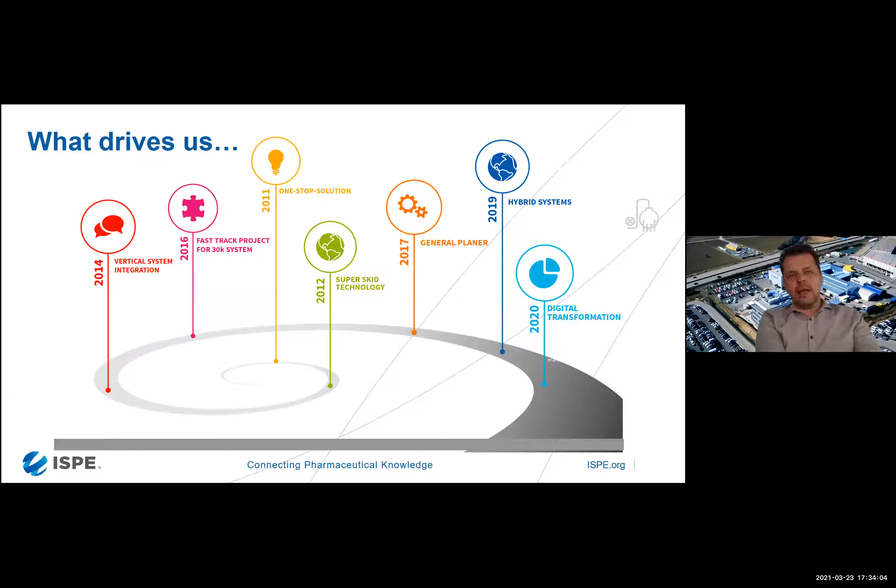And why I'm telling that is that our way of work changed a lot in 2017, because we were using a lot of digital tools then for planning, for electrical planning, for P&ID creation, for everything. But we realized that by putting together these different tools and exchanging data in an Excel format or whatever, this is not sustainable for us. So in 2018, we decided to digitize our engineering workflow.

Like you know from an ERP system, everybody is digitizing the business-driven workflows in an ERP system, let's say, if the company exceeds a certain size. And we thought about how to implement a digitized environment for our engineering workflow. And this is why we became experts in a number of domains in digitalization, and this is what was driving us.

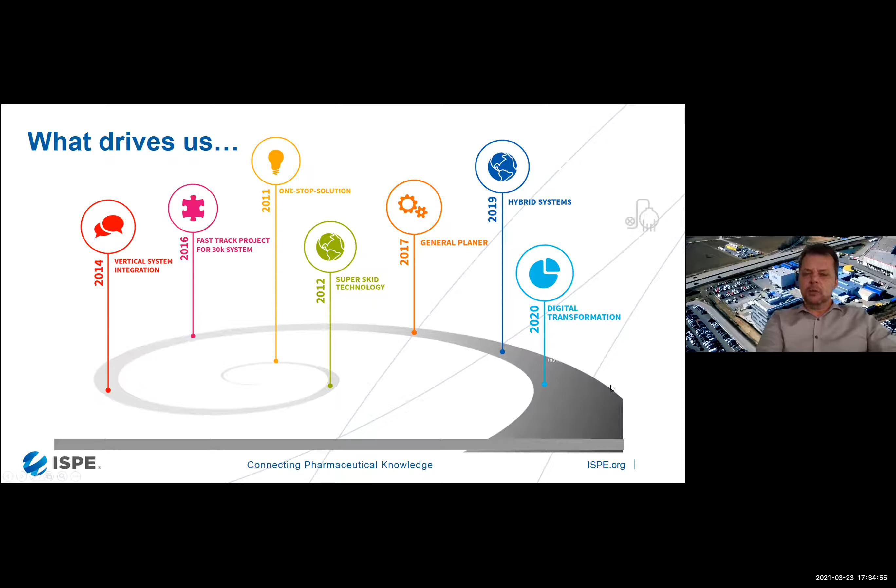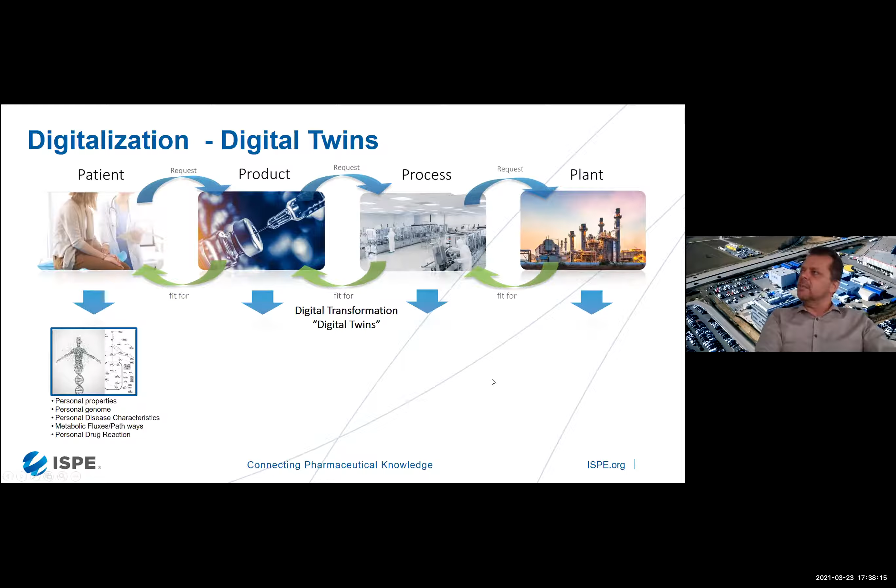Now, how does the digital twin come in? Just imagine you transform all of these four topics to the digital domain, and you try to get a digital representation of the physical patient, the physical product, or the physical process. This is where we say, what could be the digital twin of a patient? It's about its personal properties, its genome. It might be some disease characteristic or metabolic fluxes. The digital twin of the product can be seen as its product structure, its properties, its design. And you can go forward.

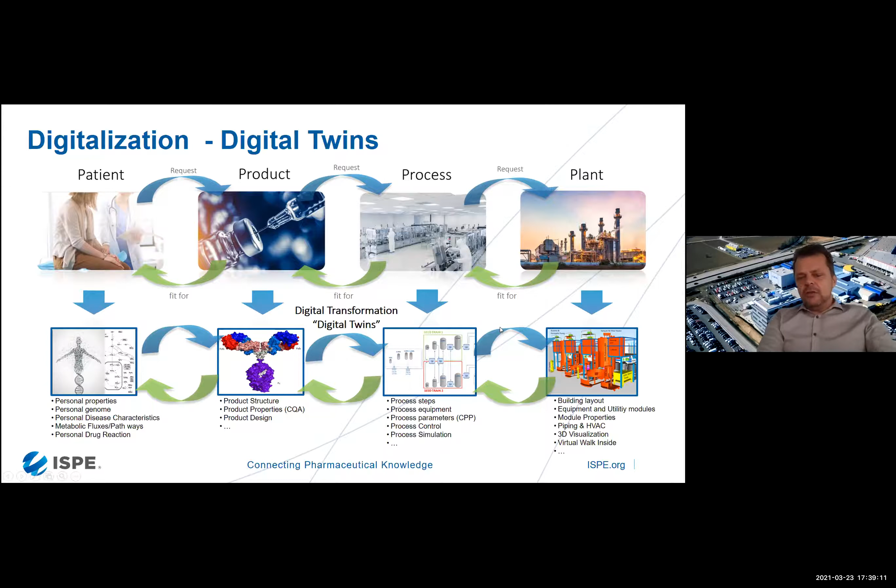Of course, there is a digital twin of the process, which covers the process steps, the equipment, the critical process parameters, and its simulation. And also you can think about the transfer from real to digital as a 3D model of the plant, which then represents the digital twin of the plant. And again, in this domain, the digital representation has to collaborate with the other domains. So this is why when we at ZETA talk about the digital twin, we don't see that there is this one digital twin, but we see different build-outs of the digital twin for different purposes. And I want to follow this concept a little to give you some ideas that we discovered recently.

Then there's the question, how do you create these digital twins? And creating these digital twins is more or less the digital engineering approach. So if you combine all the different tasks from process engineering to mechanical engineers, the plant engineers, the electrical engineers, the automation engineers, if you combine all these disciplines over the tasks, like for basic engineering, for detail engineering, for qualification topics, then you're creating this content representing the digital twin of the plant, but also the digital twin of the process, more or less as you work.

And what you can do with it is you can use this deep digital information for reducing the project risks. It's easier to manage interfaces since you're in one digital platform. You can improve change management and you have a transparent project progress, but you also can significantly reduce time for qualification and validation by using the content of this digital twin as seen in different documents, in different scenarios, in the 3D models where you can train your operators, or you can even integrate VR or AR solutions.

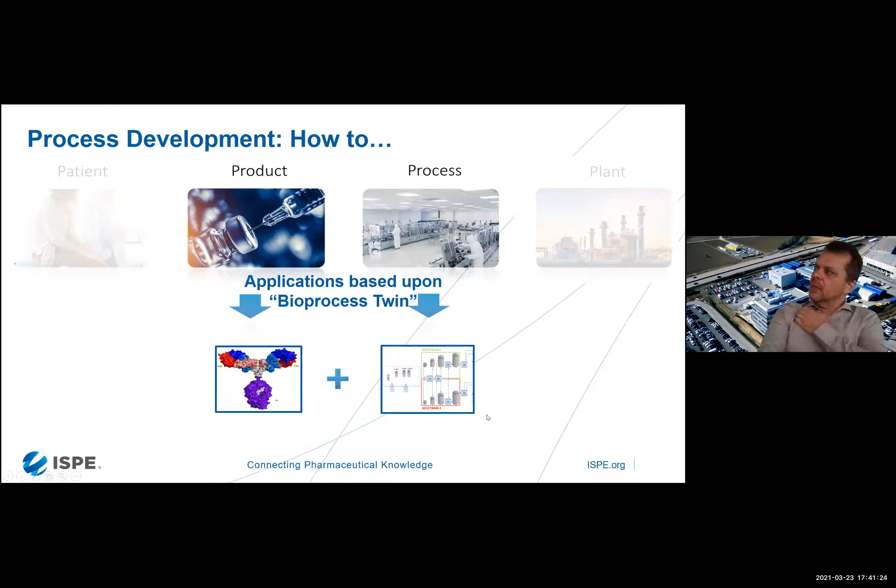So transforming the way you work during engineering and fabrication to a total digital domain delivers digital twins for process and plant with significant benefits during startup and commissioning. There are two other views on the digital twins, like product and process. So it's about getting a digital twin of the product and then the process, and how do you create these ones? Well, we have been talking about how you can cover the digital twin of the process. It's the same like we already did.

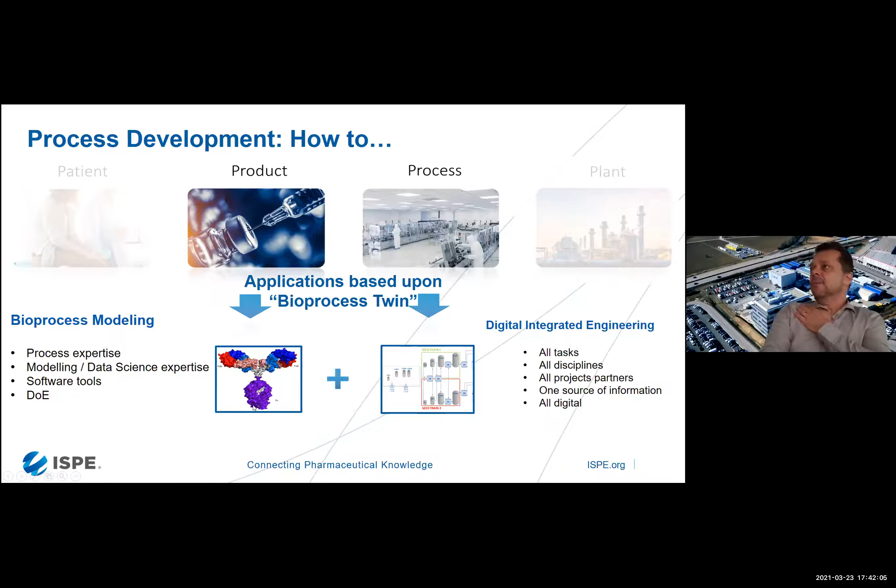And if you want to capture the digital twin of a product, it's what you usually describe as bioprocess modeling. So you're trying to get an idea on how you create this product you're looking for. How do you create a process that is securely delivering this kind of product? And then you're in the domain of DOE, modeling, data science expertise. And on the other hand, how to create the process we're already discussing. And what could you use these digital twins for?

Well, QbD and DOE are relatively frequently used terms for how you should start looking at your development road. You go for improved process understanding, you try to get a scientific-based approach, and you're using the data to find out how your process and your product are interacting. And if you do it in an even smarter way, you can also use the combination of this knowledge for model-based design of experiment, which means that you're not screening the space as you were used to, but you say, well, I know something about my process already. I want to have the experiments in this or that domain because there it looks most promising, and I don't have to test areas of my design space where I know that the process optimum won't be.

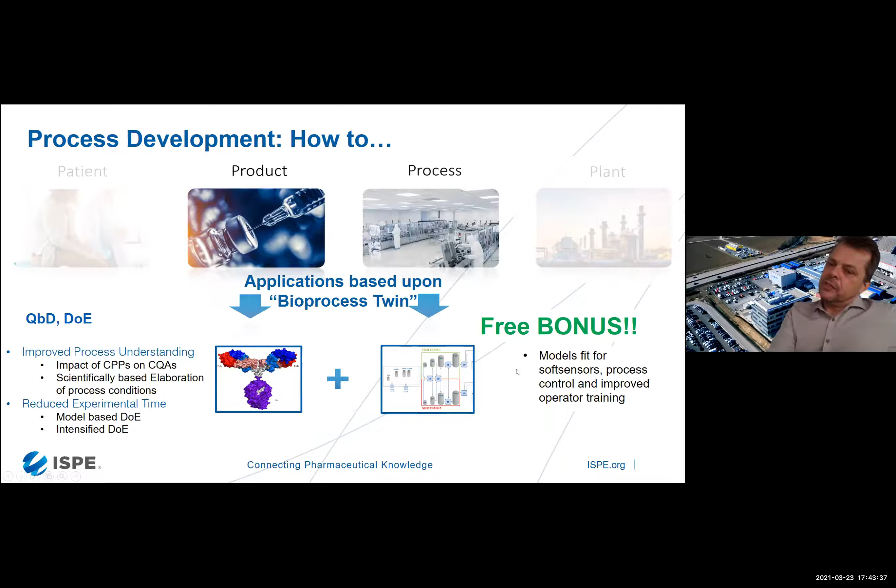Or it leads to new approaches, like actively changing the parameters during a cultivation, and you go towards the intensified DOE approach. As a free bonus, you could reuse these models during manufacturing as soft sensors, for process control and operator training. So also in this domain, digitalization plays an important role.

So well, everything's done, huh? Well, almost. If you look from a different point and you ask, what questions do we want to get answered by this approach? It depends from which perspective you look at it. If you're talking about the product and process topic, it's about how different process conditions influence the product. It's about how I can use the generated process information to reduce experimental effort. It's how safe the process is for the product. And this is the domain of our end customers, and the domain of some consulting companies in the field of AI, ML, or whatever. So these are the drivers and the players playing the most significant role between product and process.

It's a little bit different when you look at who is involved in combining process and plant. Then it's about the engineering companies. It's about how different scales and types influence the process to deliver an industrial scale process that meets the needs of the end customers. It's about what resulting equipment I need for industrial production, what CapEx costs have to be expected, by which OpEx costs I deliver a safe process regarding the operator, and how to meet the qualification and validation requirements. So having a view on these two steps, process and plant, and its digital twins, you have very different questions.

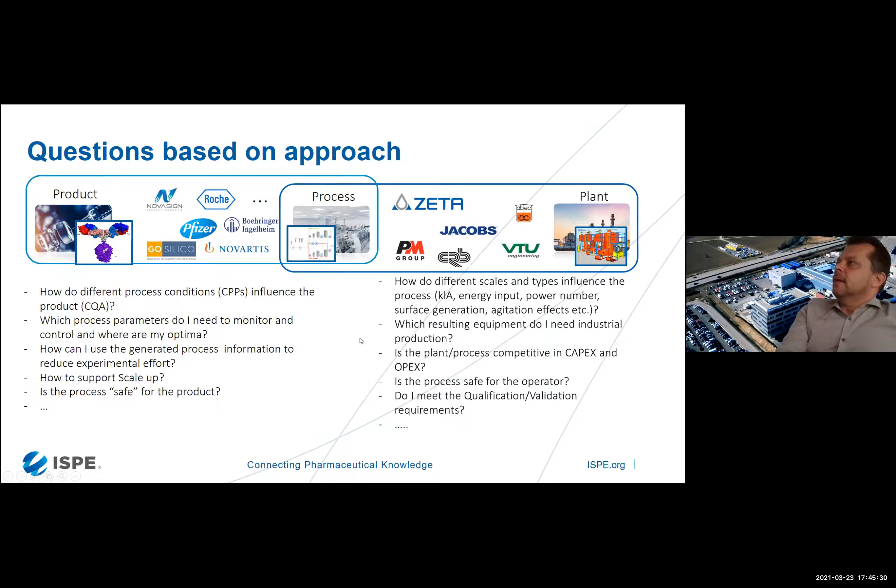And we thought, why not combine all three of them? Why not combine all the know-how and the digital things that you have at hand and say, well, if I have a model of the product and the process from the development point of view, why not combine it with a model of the process and the plant? There would be some significant advantages.

Like, you always need a little bit of the know-how that you gained in this domain when you want to create the perfect plant. So we would definitely improve in the engineering results if we had access to all the know-how that was delivered at an earlier stage.

So using the process models to implement quality by design, even then on the manufacturing side, like using the process models for controlling and optimization of a currently realized plant, that would be much more efficiently applicable if you would have a look at all these three topics out of one approach.

But of course, there are some challenges to come that way. One challenge is the different IT platforms. Usually during product and process development, you're in a wet lab, you're in a non-GMP environment, or you're just moving over to GMP. You have small skids, you have all these laboratory environments. And when you're in manufacturing at a site, you have DCS, you have all these established systems, all validated. So it's integrating these different IT platforms that is a challenge.

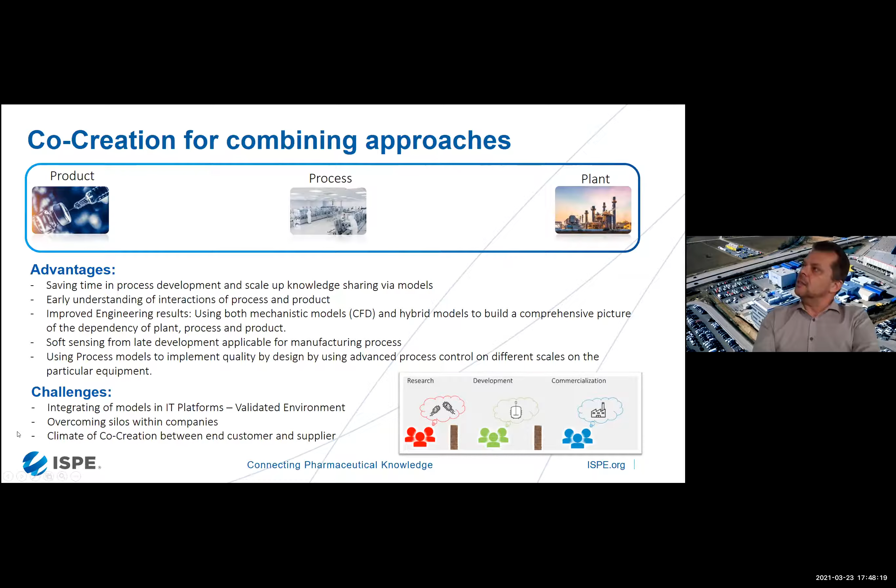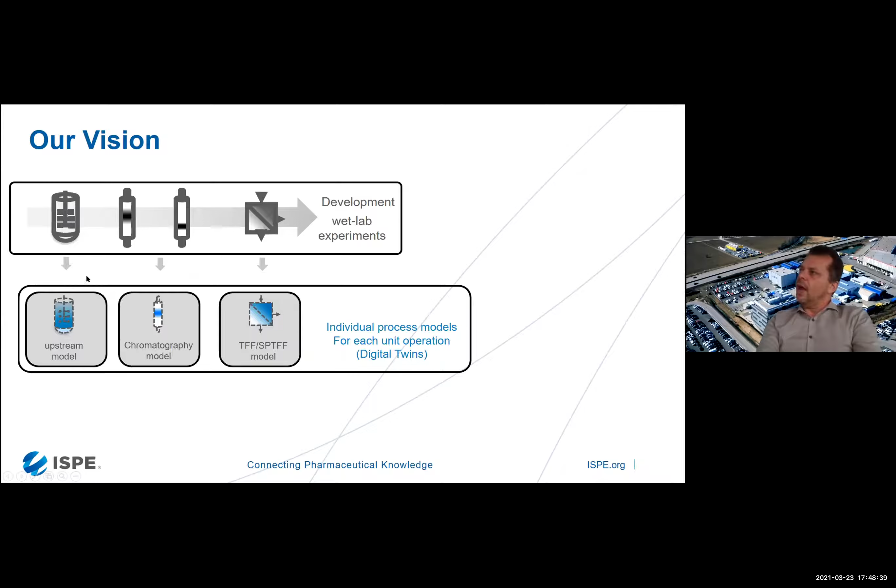So what is our vision? Our vision would start in a wet lab where you say, well, you have your unit operations you want to combine into a new process, and you work with them based on digital twins of these unit operations. So you derive different models for different unit operations, you create these digital twins, and then you combine them into a fully integrated simulation. So you already have a simulated production process of what you're going to expect in a digital format.

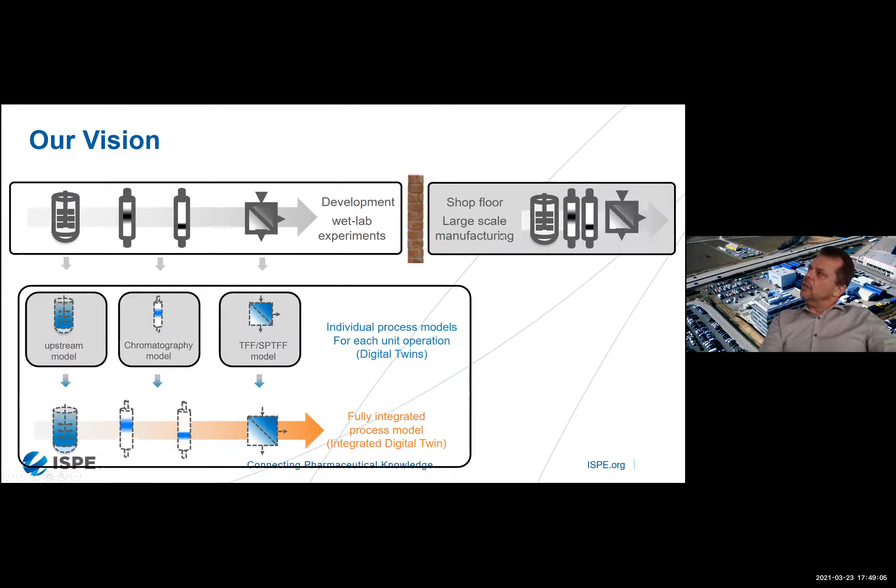And when you combine this, we should think about how to reuse that for the shop floor in large-scale manufacturing. And this is where we see you need a partner to break down the silos and to manage that entire process, so that not only for the wet lab experiments you get the feedback out of these simulations, but you can also use it for the shop floor.

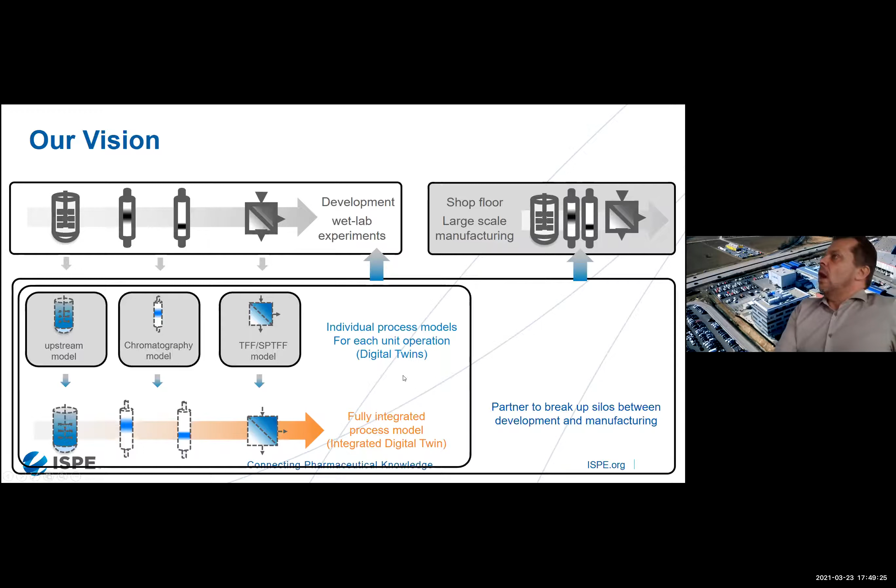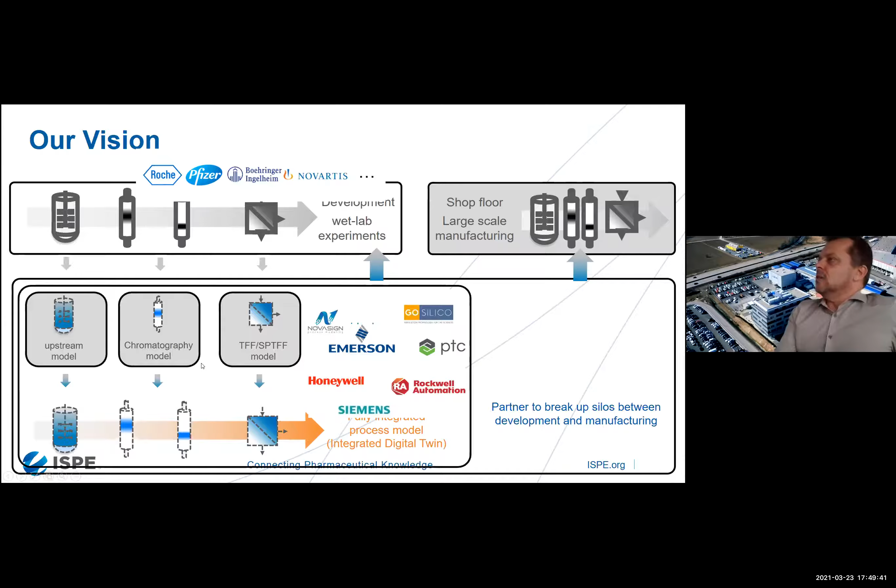So our vision is combining the needs of the customers and their work in the wet lab experiments and in development with what consulting companies and software partners can deliver in terms of IT and finance, and trying to get a group of engineering companies that are able to manage all this available information, so that all these valuable insights you're creating based on the digitalization of your development process are applicable on the shop floor during manufacturing.

So I would talk about using an upstream model that is exactly telling you how a cultivation reacts to temperature changes, and using this model for online control of your cultivation in the validated environment to optimize, for example, the time for the feeding phase or the time for creating the biomass and the seeding phase.

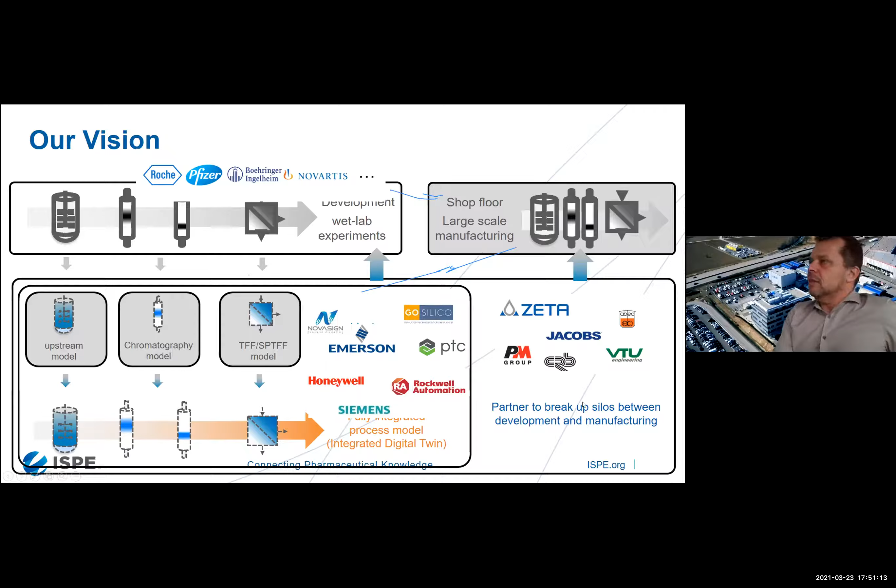So you could look at that like a GPS in your car. The map is the model, and you need something that is running the model at the same time as the process is running in real time, and that is compensating for some changes in the real process. So that would be our idea: to reuse all the knowledge that is gained during development, capture it in digital twins, combine these digital twins and use them on the shop floor.

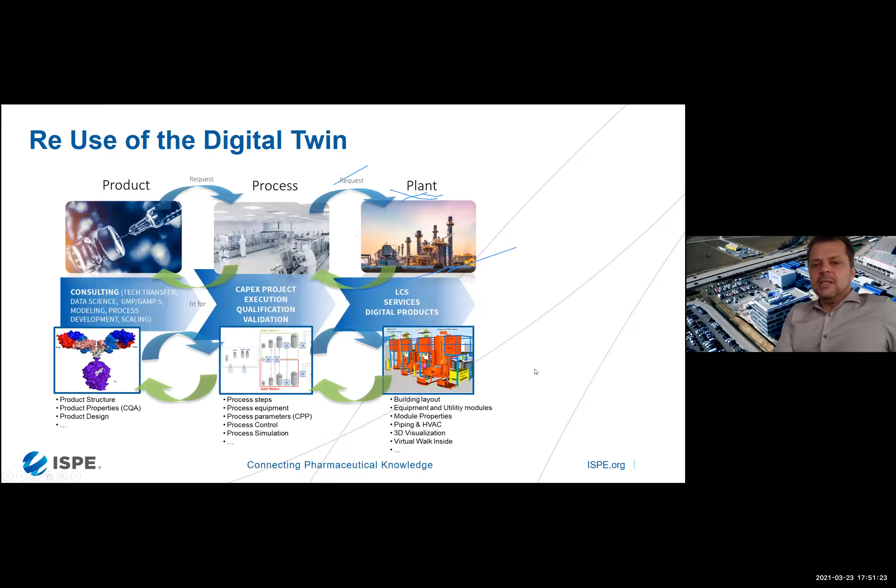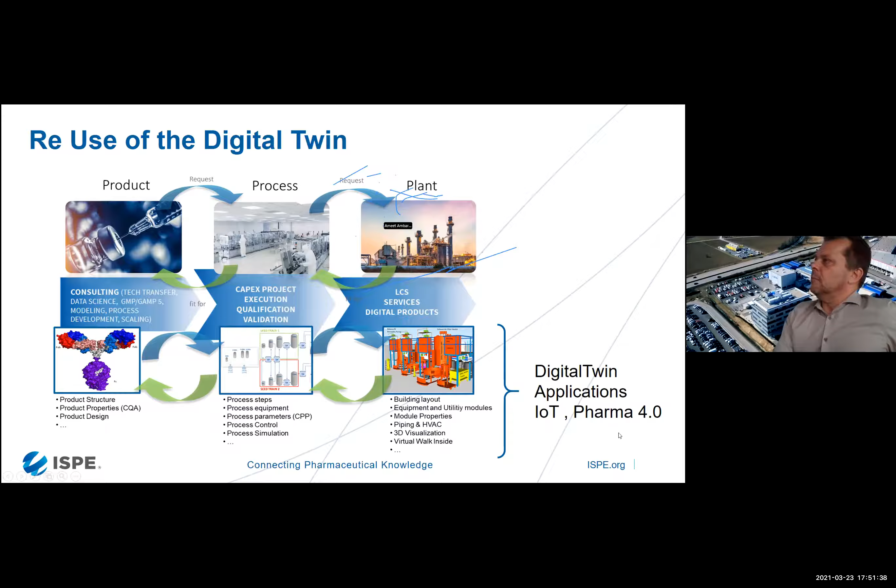And now I want to give you some ideas where we see the reuse of the digital twin. So I'm going to bring you some insight into what we already realized in applications, or what we know about these digital twin applications. They're also seen as IoT applications, or you can look at some of these applications from the Pharma 4.0 point of view.

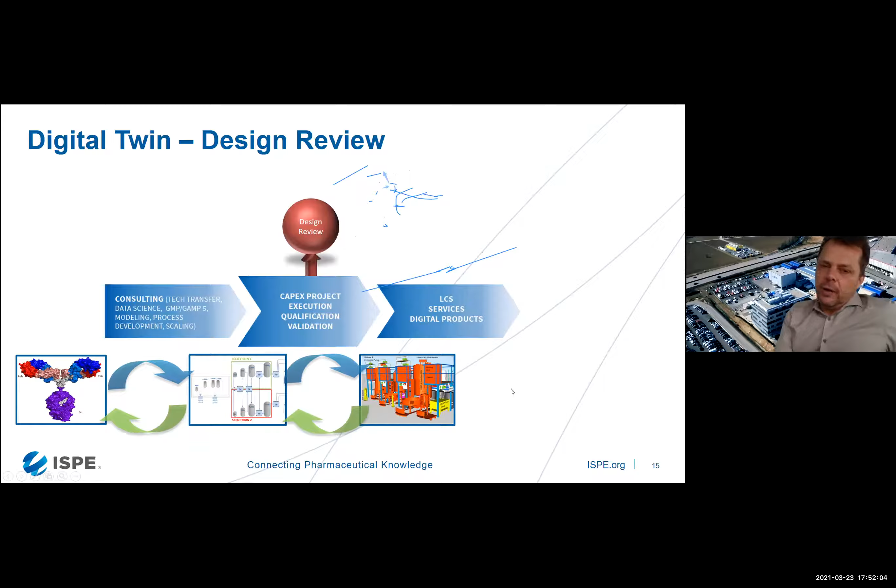So first thing I want to talk about is applying the digital twin during the project phase, during project execution for the design review. So this is something where you have already an ongoing project, you're co-creating with your customers, and you're using the digital twin for clarification of engineering details, for redlining and documentation, a little bit like somebody who is currently putting his drawings into the presentation.

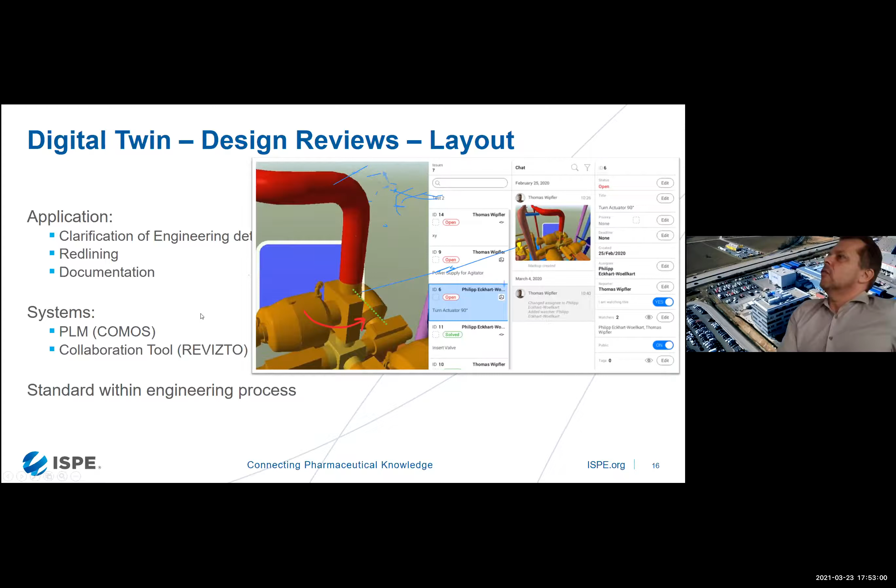We do that frequently. It's one of our standard procedures that, like you see here, when you're at a specific phase where we already have the 3D engineering of our plant, we go into collaboration with our customers, and then they say, well, due to ergonomic reasons, please move that valve 90 degrees to the right angle. And so this is documented here. Out of that, there is a collaborative tool, and we use this digital twin of the plant for co-creating with the customer how to change during the engineering phase.

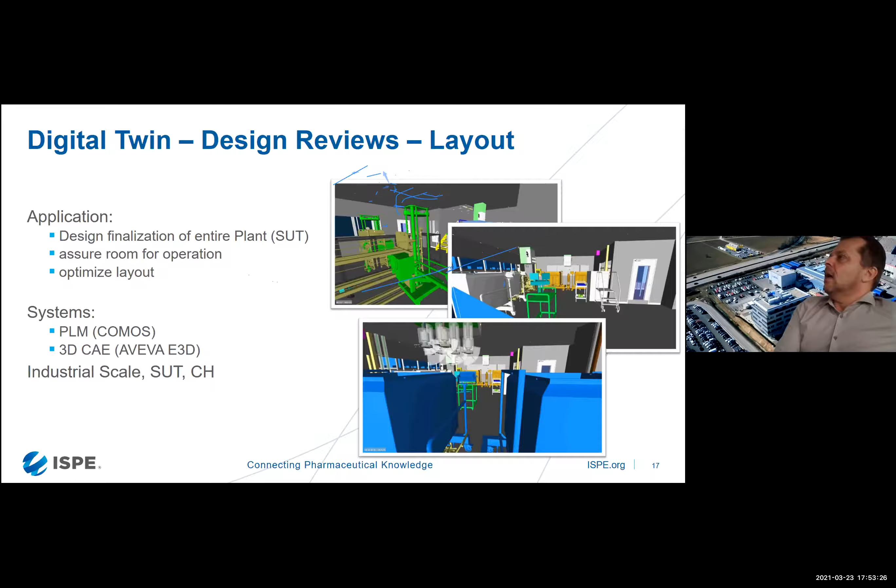What secondly applied also in the design review phase is that at the end of an engineering phase, you get a 3D model. And in that case that I'm allowed to show here, it was the design of an entire SUT plant. So it was single use. And the topic was, are we sure that we have enough room for operation, for moving with the operators and all the other personnel? Because it was a given building and we had to squeeze in quite a bit of equipment. And so the customer together with us was relying on this 3D model of this digital twin of the plant to make sure that there is enough space for moving around.

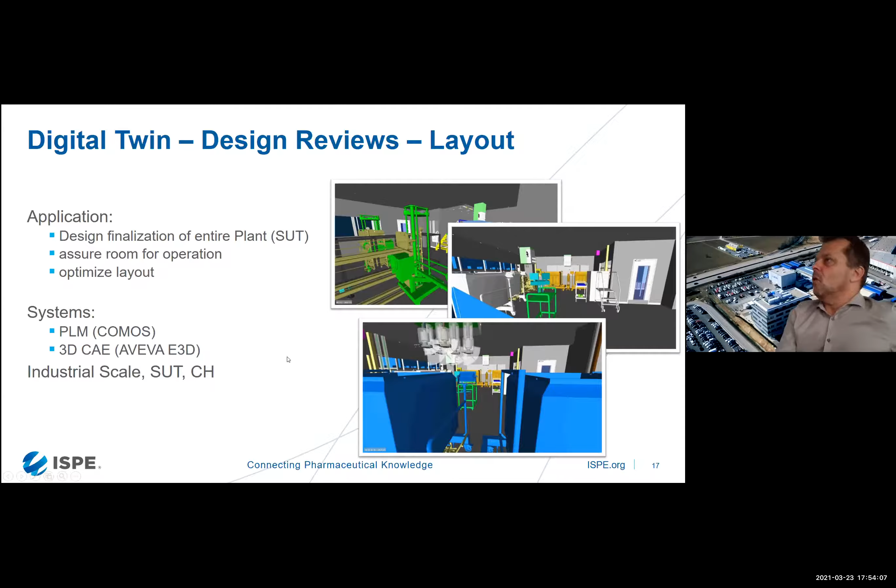And you see, this is why all this auxiliary equipment is included here, because they really wanted to be sure that it can pass through and that there is enough space. So also in this point of view, you're using the digital twin of the plant, which is the 3D model, for securing operations.

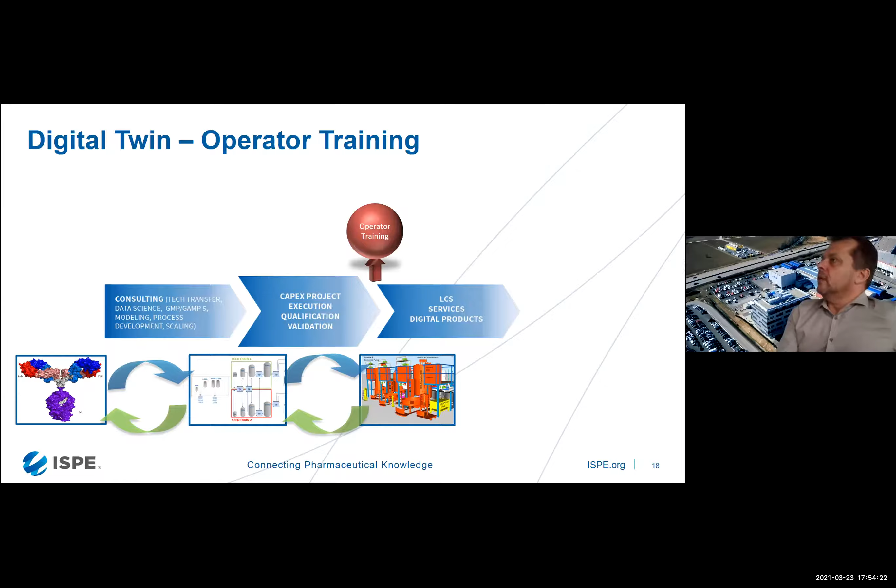Another build out of the digital twin that we have at hand currently is using the digital twin or the combination for operator training. So when you go through this digital engineering, you get pretty much of information. During the engineering, you have every electrical plan, you have the 3D model of the plant as such, you have all the information about automation, and you derive the DCS based on that. So you know about the piping, you know about the positioning of the valves, so you can roughly easily say, well, you can use the DCS and you're using the digital twin of the process, which is covering, let me say, the technical topics like pressure, temperature, and stuff like that.

On top of that, you might put a bioprocess model that will then calculate the impact of the temperature on biomass involvement or on product formation. And you put that together, that you run the process out of a DCS even before the plant is built, because you have all these informations at hand before you go into fabrication of the entire plant. That means you can use the digital twin of the product, which will be the bioprocess model. You will use the simulation of the process and your automation system for an online training of your operators.

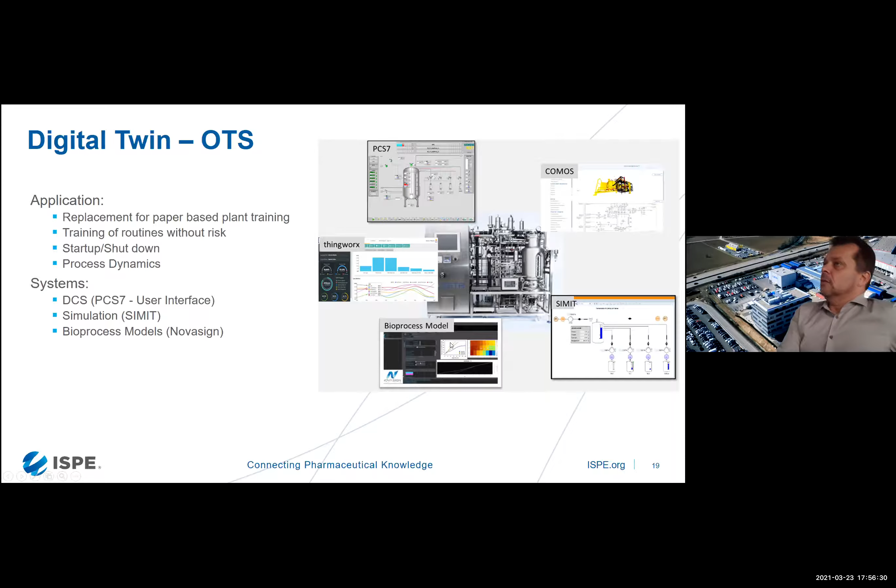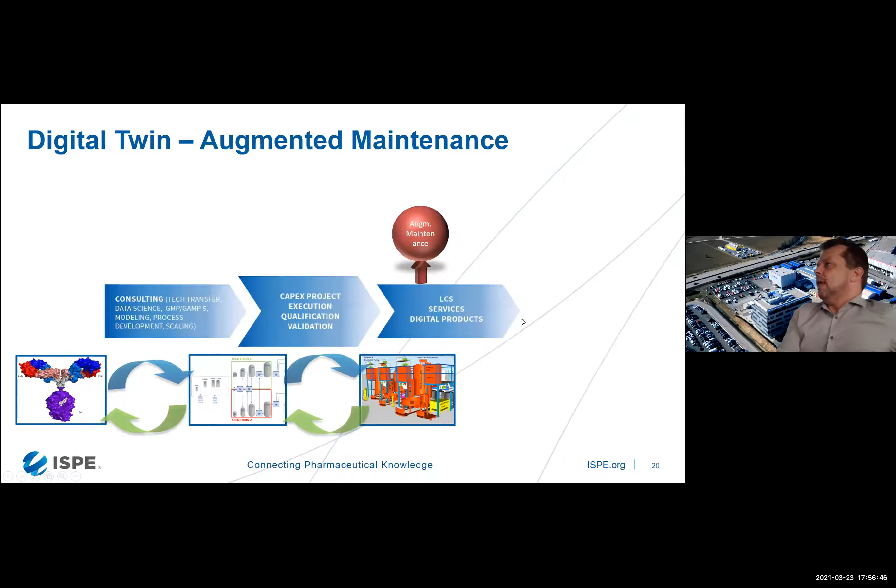Well, finally, there is a third application that I want to show you, which is not positioned during the project execution, but rather when the plant is already up and running. It's about how to augment maintenance activities. And this is using a personal assistant for maintenance engineers. It's a roughly simple idea that you say you're creating such an enormous amount of information during engineering, all the wiring diagrams, all the documentation of spare parts. You know exactly where all your valves are positioned.

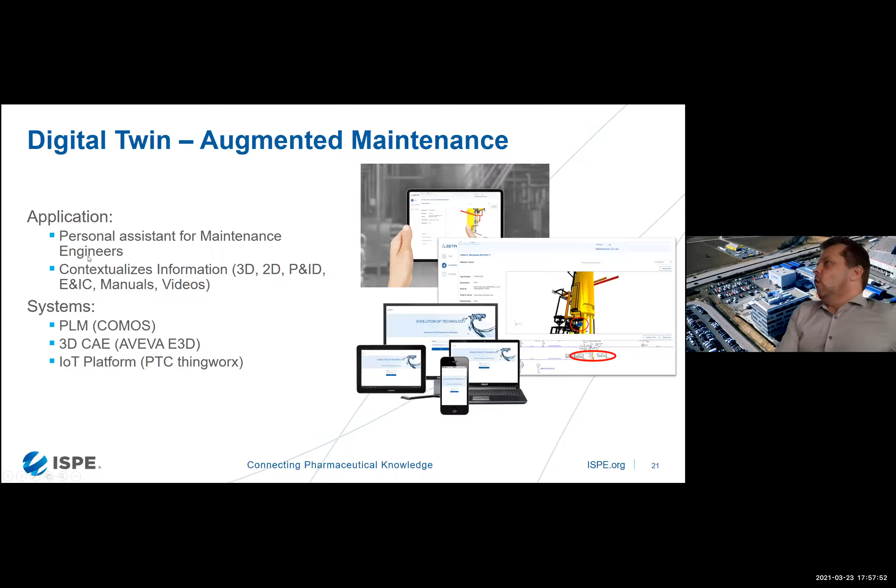You have 3D models, you have 2D floor plans, and we just thought about how to deliver that information in the context that is relevant for the maintenance engineer. So creating a personal assistant that allows for delivering the right information right to the shop floor where the maintenance engineer is working delivers a value add on, let me say, exploiting the digital twin of the plant regarding all the context that is relevant for the maintenance engineer.

So to give you a quick summary, how do I see what drives us in digitalization in the pharma industry? Everybody is working in software in engineering currently. Either it's AutoCAD or it's, I don't know, an AVEVA or whatever environment they're using. Everybody is using software for drawing 3D models. You use software for creating a P&ID. You use software for doing the electrical planning.

That means you're covering a lot of information. You're covering all the specifications that you want to do. You create the functional specification based on the needs of the end customers. If you do that in a digitized engineering environment and you put all these things together and you're able to manage that information in one central hub, then you get a really, really proper digital twin of your plant and of your process. And this is just because you go through that engineering work anyways.

On top of that, if you think about a process model that is covering, like in this case, an upstream fermentation process, and you think how these technical process parameters interact with the quality of the product, you can deliver even more because you can suddenly get an idea how a change in running the plant impacts the quality of the product. That means you also have to think about how to include the knowledge that is created during product development and R&D. How do you combine that knowledge with all the models and the know-how that is done during engineering?